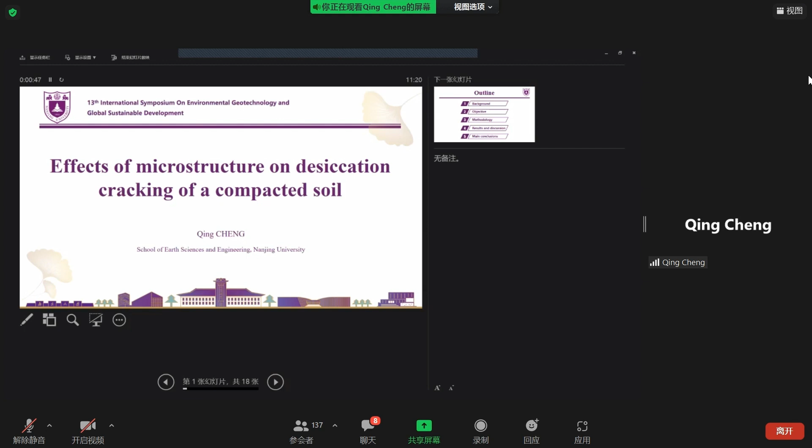My presentation is about effects of microstructure on desiccation cracking of a compacted soil. This is the outline. The presentation mainly consists of 5 parts. First is the background. With global climate change, more frequent and longer lasting drought may appear in some regions in the future and even exceed a critical threshold for human adaptability.

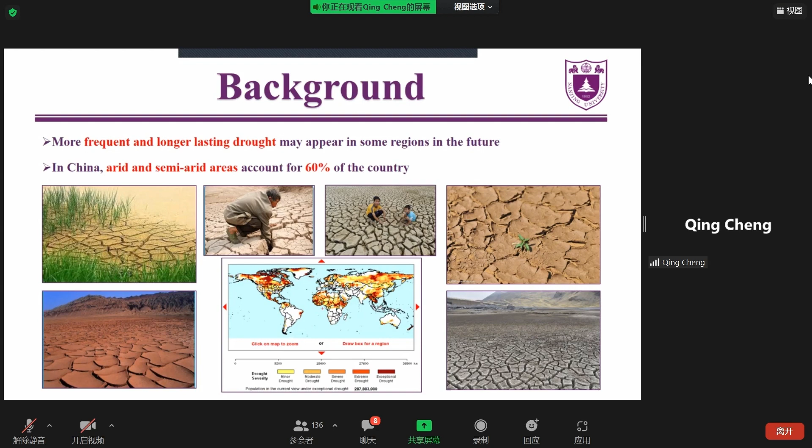Responding to drought, soil desiccation cracking as a natural phenomenon is projected to be intensified, especially in the arid and semi-arid regions. The development of cracks can have a significant influence on the mechanical and hydraulic properties of the soils, leading to a variety of geotechnical and geological engineering problems.

For example, in pavement engineering, the desiccation cracking in the subsoil can have a negative influence on the long-term serviceability of the roadways and endangers the safety and quality for the traveling public. In slope engineering, the desiccation cracking may increase the risk of rainfall infiltration and further reduce the factor of safety of the slope.

And in landfill engineering, the desiccation cracking in barrier soils may result in more serious rainfall infiltration and landfill gas emission, further contaminating the surrounding groundwater and air.

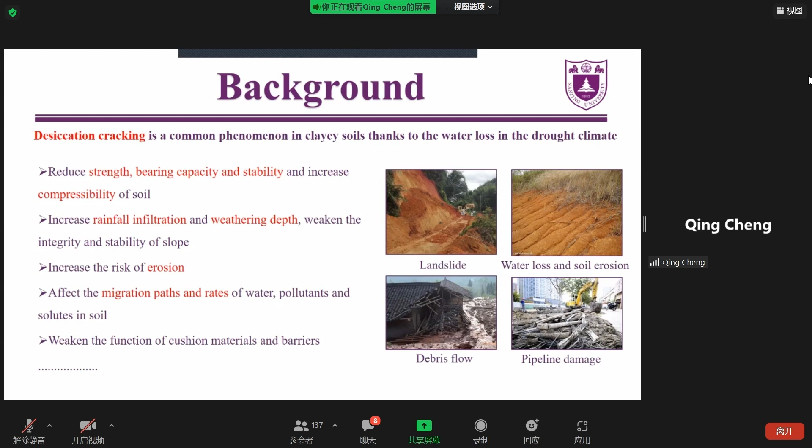In the past few decades, many researchers have paid attention to investigating the various influencing factors of the desiccation cracking of soils. The influencing factors can be separated into 2 main groups: the soil internal factors and the external environmental factors. The internal factors include the mineral composition, fines content, water retention characteristics, tensile strength, size, and thickness of

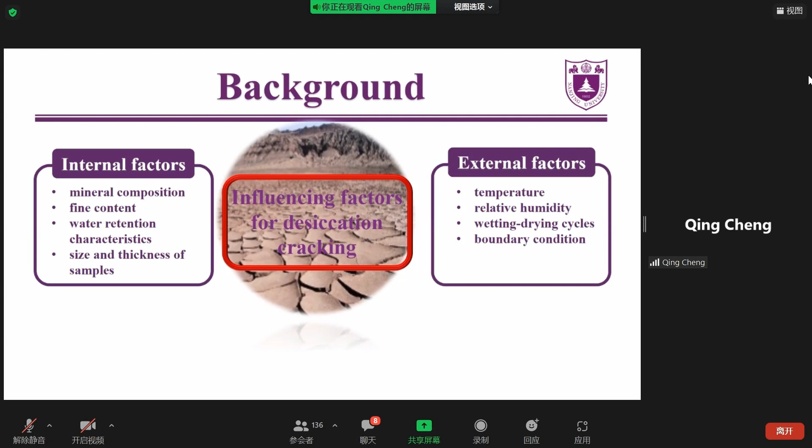the soil samples. While temperature, boundary condition, relative humidity, wetting-drying cycles, and other external environmental factors also affect the desiccation cracking behavior. In most of the previous studies, the experiments were conducted on slurry samples. However, in terms of engineering practice, compacted soils are more often used as construction materials.

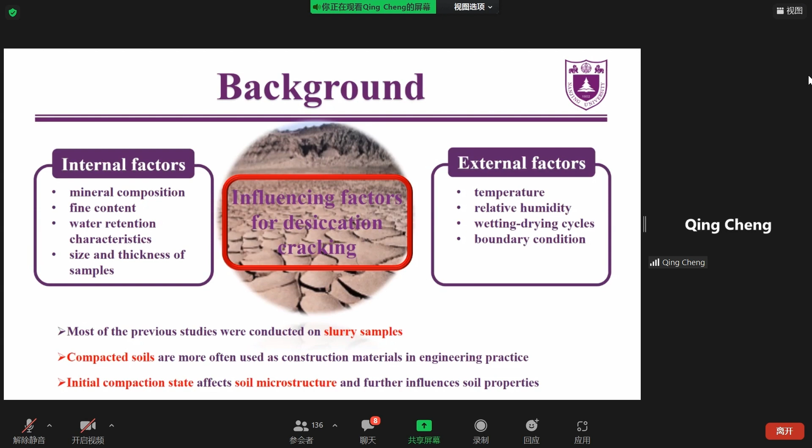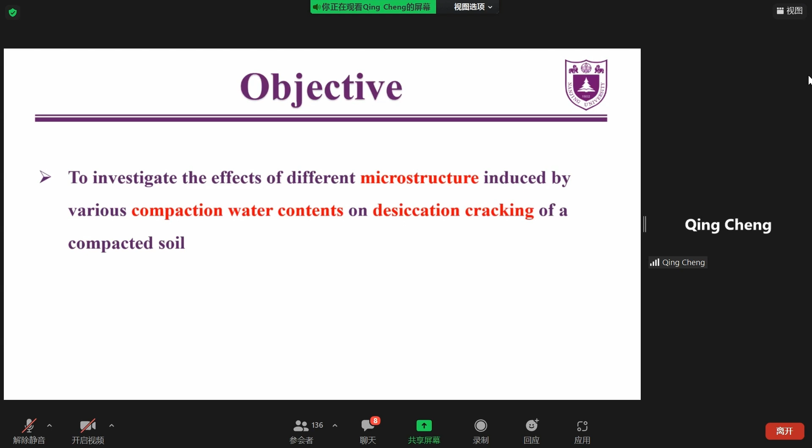Based on this background, the principal objective of this study is to investigate the effects of different microstructures induced by various compaction water contents on the desiccation cracking behavior of a compacted soil. The testing material is Xiashu soil taken from Nanjing, China. According to the ASTM standard, it can be classified as a lean clay.

In this study, 5 soil samples are compacted with 5 different water contents. 2 samples are compacted on the dry side, 1 sample at the optimum water content, and another 2 samples on the wet side. After compaction, the soil samples were subjected to saturation and then the drying process. The pore size distribution of each soil sample is characterized by performing the MIP test.

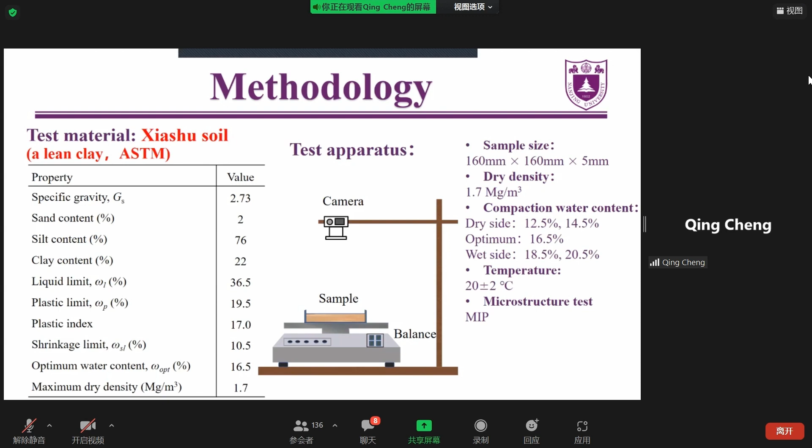The change in water content and the evolution of the surface crack pattern during the drying process are continuously monitored in the test. The images taken by the digital camera were analyzed using the software Crack Image Analysis System developed by Nanjing University. First of all, the image pre-processing, including binarization, denoising, smoothing, skeletonizing, crack identification and clod identification.

Then the next step is the quantitative analysis, and we can get geometric indexes like the length and width of each crack segment and angle of each intersection, general indexes like the number of intersections and crack segments, average crack length, average crack width, surface crack ratio, and also statistical indexes like the probability density function of crack length, crack width, and intersection angle.

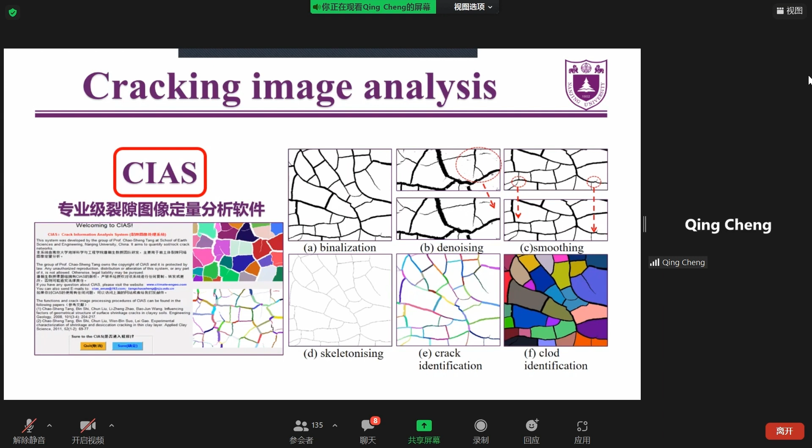This is because for the soil samples compacted on the dry side and at optimal water content, the clay particles assemble together and the aggregate structure is well developed. However, we can find that for the soil samples compacted on the wet side, the pore size distributions show a unimodal form. This is attributed to the assembly of the clay particle matrix around the silt grains and the gradual formation of a dispersed structure.

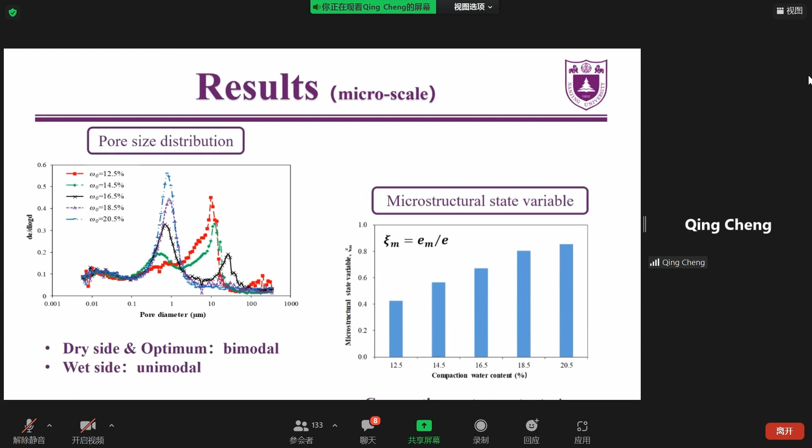Moreover, a simple microstructure state variable is adopted to quantitatively describe the microstructure of the samples. It can be found that with the increasing compaction water content, the microstructure state variable increases, which means a less aggregated structure of the clay particles.

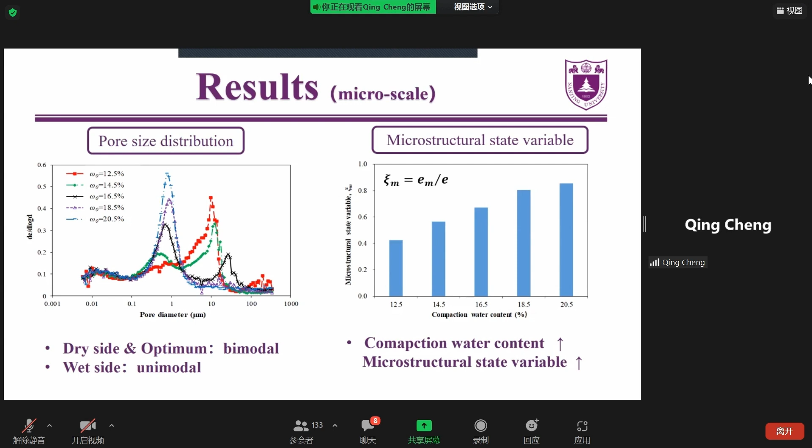For the soils with aggregate structure, the macropores between the aggregates have a larger pore size, leading to a higher strain energy prior to cracking. Thus, the places between the aggregates can be regarded as surface weak zones, resulting in the crack initiation.

Moreover, we can find from the pictures that several crack initiation points appear almost simultaneously. And from one crack initiation point, the three cracks propagate in three directions with an angle of 120 degrees, resulting in a Y-shaped crack intersection. This can be explained by adopting the concept of Griffith's fracture energy balance. The Y-shaped crack intersection is the most energy efficient, where the crack length required is minimum for expending the same amount of energy.

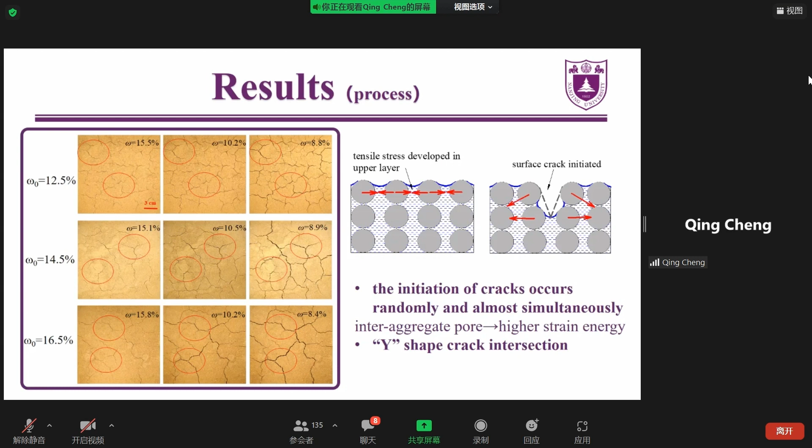And the crack propagation manner of the soil samples compacted on the wet side with a dispersed structure is more similar to that of the slurry samples investigated by previous researchers. We can find that the primary cracks initiate first and the subcracks initiate at the existing primary cracks, almost perpendicular to the primary cracks.

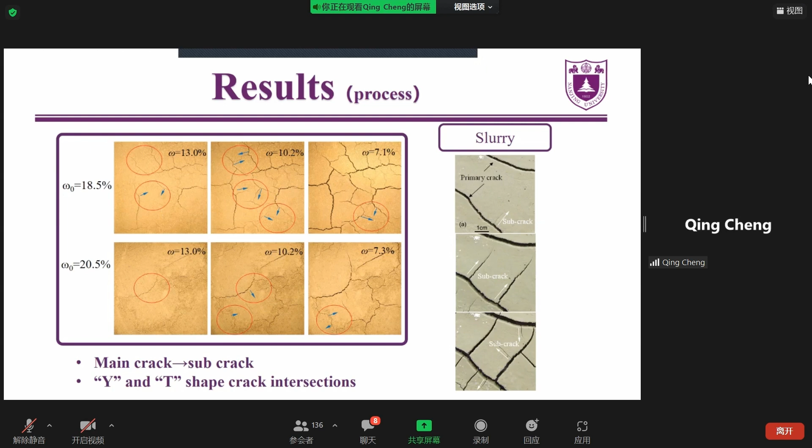This can be explained by adopting the maximum stress release criterion. When the primary cracks initiate, the internal tensile stress perpendicular to the existing primary cracks is released, and the new maximum tensile stress is parallel to the existing primary crack. Thus, the subcracks grow at the local maximum tensile stress, which are perpendicular to the primary cracks.

This is because the cracks in the samples compacted on the dry side and at optimum water content appear in the voids between aggregates, while the cracks in the samples compacted on the wet side appear in the voids between the soil particles. The larger pore diameter develops smaller suction, resulting in a higher amount of water retained in the soil. As a result, a higher cracking water content can be observed for the soil samples compacted on the dry side.

Moreover, we can also find that during drying, the surface crack ratio of all the samples shows an increasing trend. Specifically, for the soil samples compacted on the dry side and at the optimum water content with bimodal pore size distributions, the surface crack ratio increases almost linearly with the decreasing water content. This is because for these samples, all the cracks initiate at the same time and the generated cracks gradually widen with further drying.

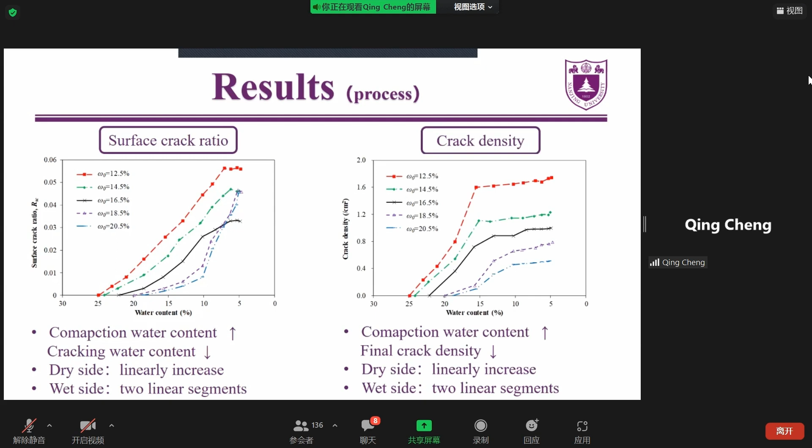First of all, the independent Y-shaped cracks between the aggregates initiate evenly on the soil surface with soil shrinkage during the evaporation. And these cracks extend gradually until reaching the edge or intersecting with each other. And the geometric structure of the crack pattern is formed.

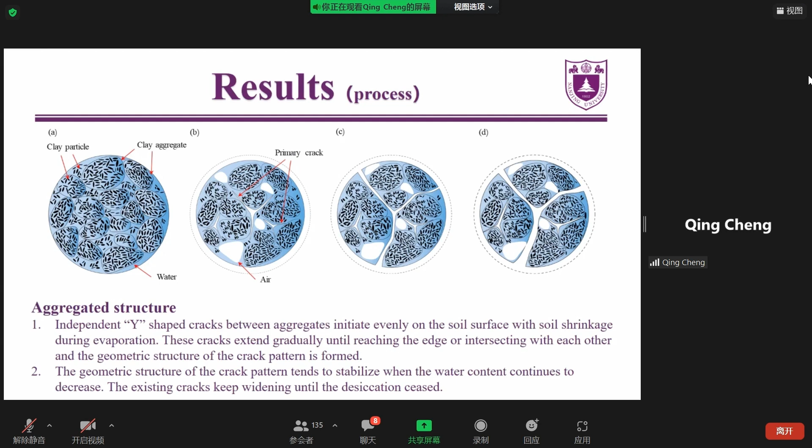And then the geometric structure of the crack pattern tends to be stabilized when the water content continues to decrease, and the existing cracks keep widening until the desiccation ceases. For soil samples with a dispersed structure, desiccation cracking can be summarized into three stages. Firstly, during the drying process, water evaporates and soil shrinks.

You have about 5 minutes left.

Okay, thank you. Independent cracks between the soil particles initiate at the inner surface or the edge and propagate until reaching the edge or intersecting with each other. And these initial independent cracks are considered as the primary cracks.

And then perpendicular to the existing primary cracks, some thin cracks initiate and propagate. These thin cracks are regarded as subcracks. Both the primary cracks and the subcracks form the geometric structure of the crack pattern.

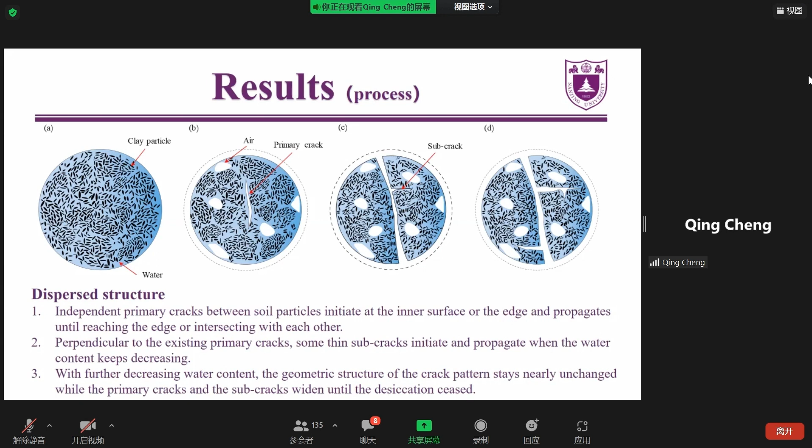And the third stage is with further decreasing water content, the geometric structure of the crack pattern stays nearly unchanged, while the primary cracks and the subcracks widen until the desiccation ceases. And this slide shows the final crack pattern of each soil sample.

We can find that there exist more fine and thin cracks in the soil samples with lower compaction water content. This represents that there are less weak zones in the soil sample with a higher compaction water content.

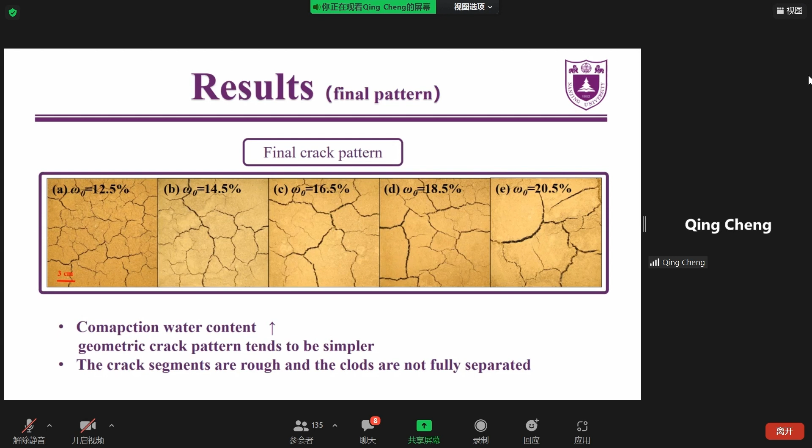In previous studies investigating desiccation cracking of slurry samples, the researchers get a common view that the crack segments are smooth and the soil surface is split into separate clods by the crack network. However, in our study, we find that the crack segments are rough and the clods of the compacted soil samples are not fully separated. This can be attributed to the homogeneous structure of the slurry samples and the heterogeneous structure of the compacted soil samples.